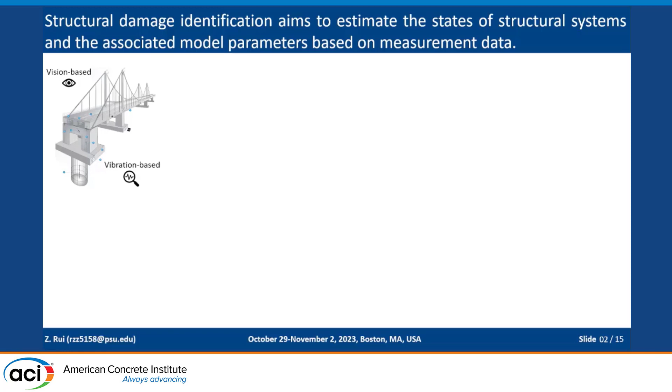So in that case, we can get a lot of data. It can be used as a classic input and output system. We can analyze this data using structural damage identification approaches to identify the damage and then assess the condition of the structure.

Based on whether we know exactly the model of the structure, it can be divided into two parts. The first is based on the physics model, which means we have a detailed model of the system. For example, we can use finite element modeling to create a detailed model.

But it can be computationally expensive, because when we get the sensor data, we need to update the model continuously. It can be computationally expensive.

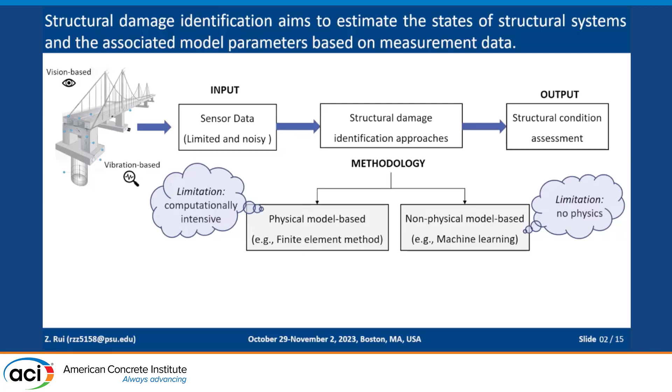Another approach is purely data-driven. In that case, we don't have exactly a physics model of this structure, but we can use machine learning, like neural networks, to represent this structural system. Both of these two approaches have benefits and also limitations.

However, recently, a new methodology called the physics-informed neural network has gained a lot of interest in different areas. The basic idea of PINN is to try to combine physics and machine learning.

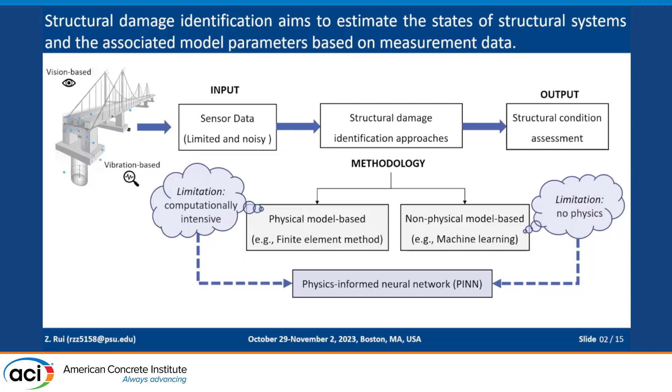Particularly in practical use, we have limited data, but we also have some physics, though not complete physics. In that case, PINN can be used to solve this kind of problem.

Before I go deeper into the methodology, I will give a brief review of how PINN works. This is a typical architecture of a neural network. It can map the input and the output with several hidden layers.

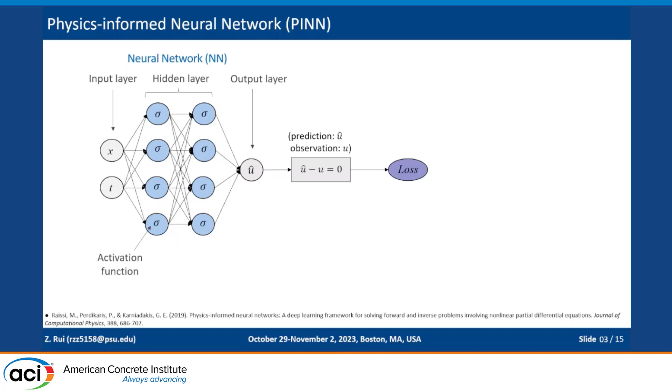The general idea is we try to minimize the difference between the prediction from the neural network and the measurements, trying to minimize the loss.

For the physics-informed part, we try to add some physics information, which means during the training process, the output should not only fit the data, but also fit the physics constraints.

So in that case, the loss will have two components: one is purely data-driven, the other is based on physics-informed constraints. By minimizing the loss, we can finally get the unknown parameters of the neural network.

At the same time, if the physics behind is incomplete, meaning some unknown parameters in the ODE or PDE need to be identified, they can be identified during the whole process. That's why it is very powerful, particularly for the inverse problem.

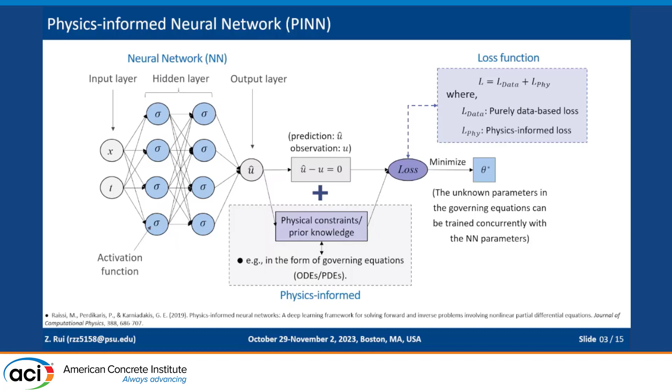Okay, so this is the basic idea of PINN. For today's presentation, we try to develop a physics-informed neural network framework, particularly for the structural damage identification problem, and I will use two examples to show the process.

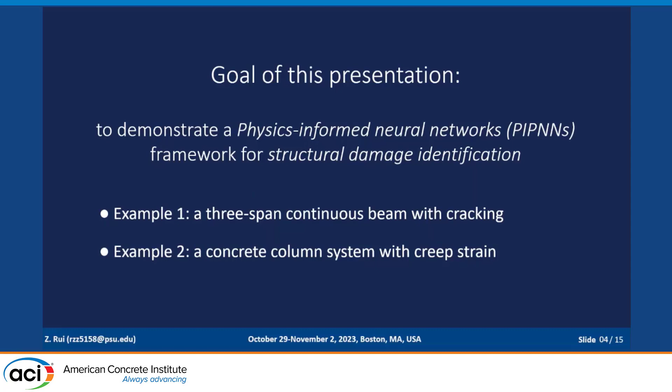The first example is a 3-span continuous beam with cracking, under a moving vehicle load. We can find that the first span and the third span have some cracking.

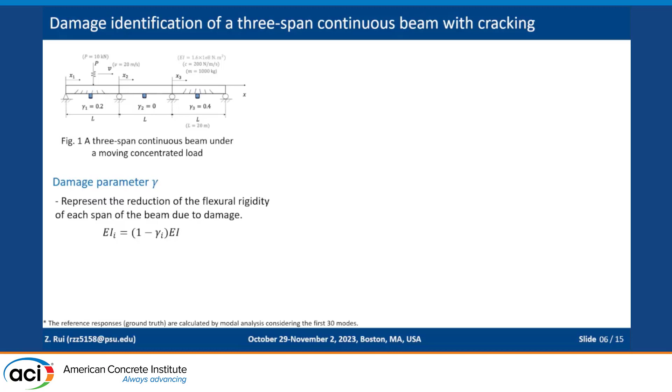We use a damage parameter gamma to represent the reduction of the flexural rigidity of each span of the beam due to damage. So gamma here is the damage parameter: if it equals 0, it means there is no damage, and if it equals a critical value, it means it has failed. Generally that critical value equals 1, or a value very close to 1.

So we use the damage parameter gamma to represent the damage, and the goal is to estimate the damage parameters. The given information is, firstly, we put 3 sensors, one on each span.

For the acceleration, we use in the numerical simulation some finite element modeling to get the response, and add some noise to show the real condition.

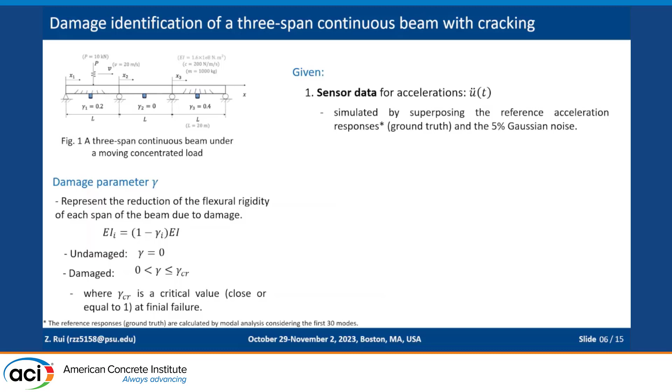And also we have some physics. The first physics information is a governing equation, which is a PDE function to represent the structural behavior between the acceleration and the deflection with respect to the moving vehicle load. The gamma right here represents the damage, but we don't know the exact value. So we also have the boundary conditions of each support.

So based on the sensor data, which is noisy and limited, and also the incomplete physics, we try, based on these two components, to determine the damage parameters for each span.

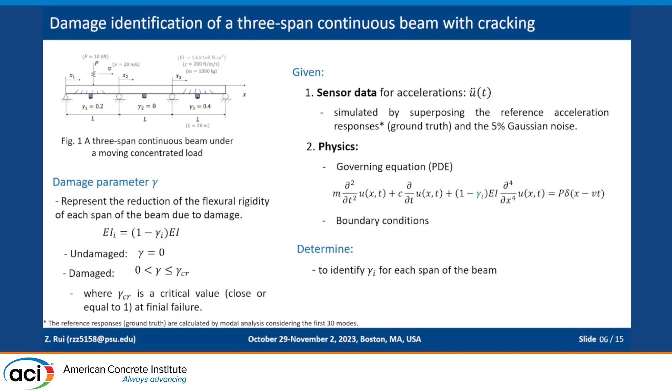So the next step is we try to create a neural network framework for solving this kind of problem. For example, for this case, we have 3 spans, so for each span we will create a neural network. I just showed the first 2 for the first span as an example. So the input is the location x and the time t, and the output is the deflection of the system.

So the first part is we got the sensor data, so the output should fit the sensor data. So we got the loss component with respect to the sensor data.

And another thing is for the whole domain, each segment should satisfy the physics, which means the governing equations. So we got the loss function with respect to the physics.

And also we have physics between the first span and the second span, which is the boundary conditions of the second support, meaning both neural networks should satisfy the physics at the interface between the 2 spans. So right now we can get all the sensor data and the physics loss component.

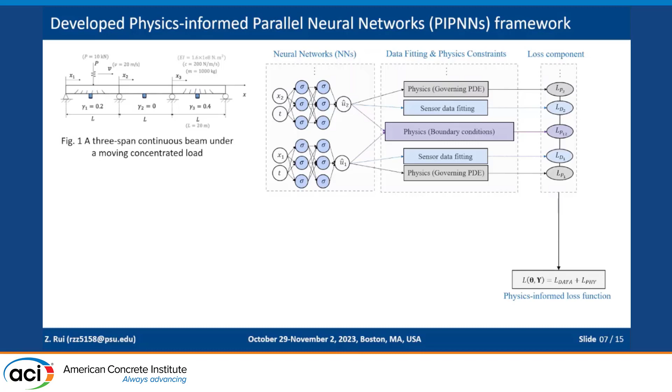So this is the combined loss function. We got the data and we also get the physics. By minimizing the physics-informed neural loss function, we can update the unknown parameters of the neural network and also update the unknown damage parameters.

So when we get the neural network parameters, we can get the neural network. And the trained neural network can be used to predict all the response of the system, meaning the 3 neural networks can represent this system. So this is generally the framework used for this particular case.

And this framework can be generalized for different use cases. If you change the load condition or change some parameters, the framework can still be used.

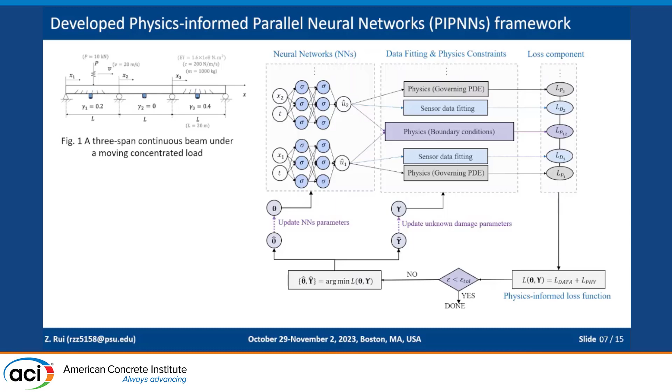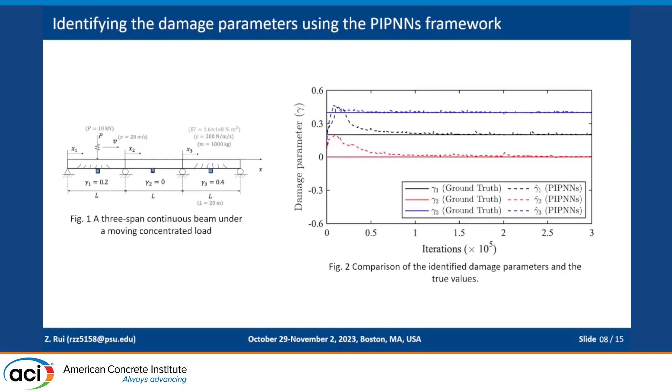So this is the material properties for the concrete. Firstly, we assume that the damage parameter gamma represents the reduction of the cross-section area of each component due to the damage. We can find that for each column the damage is different.

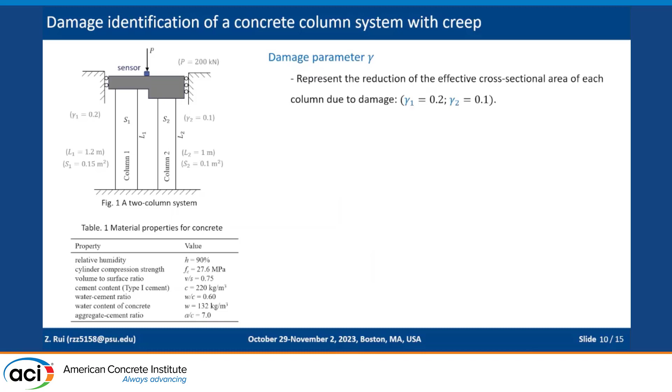We also add sensor data, which is a deflection, and we also add some noise to represent real conditions. We have some physics, which means the resistant force of each component, summed together, equals the applied load. Also, the displacement of each column should be equal.

So based on the physics and also the sensor data, the goal is we try to identify the parameters gamma of each column. And at the same time, we try to estimate the stress and also the strain.

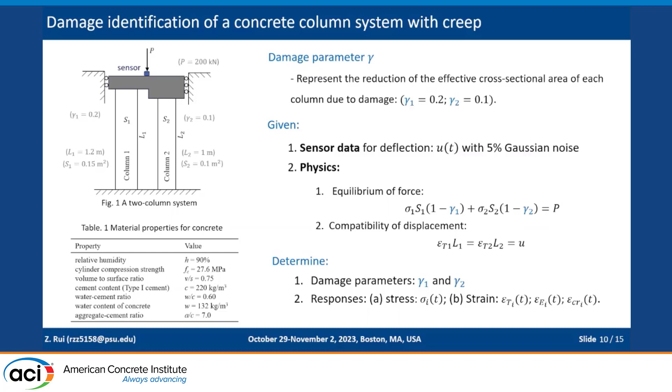For elastic condition, it is straightforward, we can get the response very easily. But if we consider creep or shrinkage, particularly for a concrete problem, it will be a nonlinear process, which is complex. But for the inverse problem, we can still use physics-informed neural networks to solve this kind of problem.

Before I go into the details of the methodology, I will give a brief review of how to get the shrinkage and also the creep. So I use a B3 model to calculate the creep and the shrinkage.

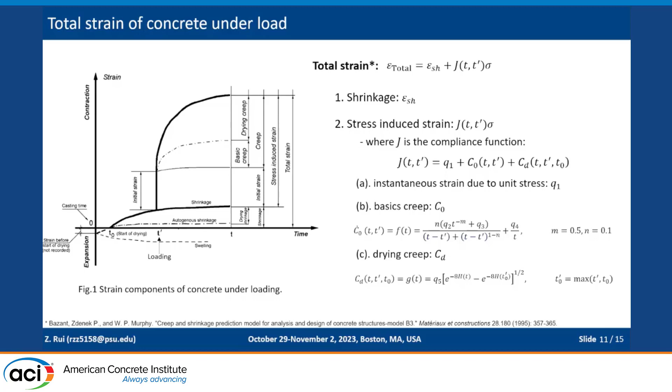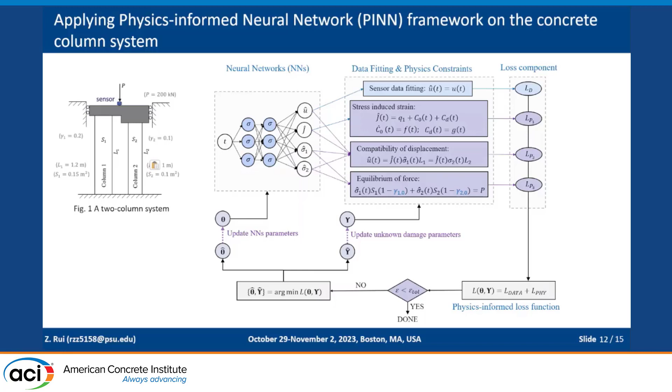I will skip the details, and after several iterations we can get the result. The first figure is about identifying the damage parameters. We can find after a few iterations, the identified parameters, shown as a dotted line, can converge to the ground truth. This is about the stress, which is normalized.

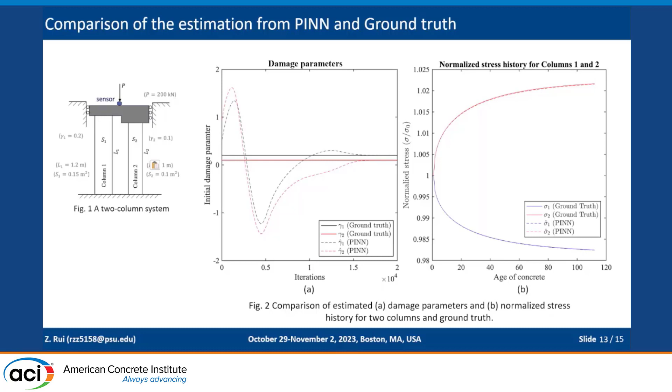The red one is for the second column. Because we consider creep and shrinkage, the stress will redistribute, meaning the stress increases for the second column but decreases for the first one. But again, the PINN can get a good result compared to the ground truth.

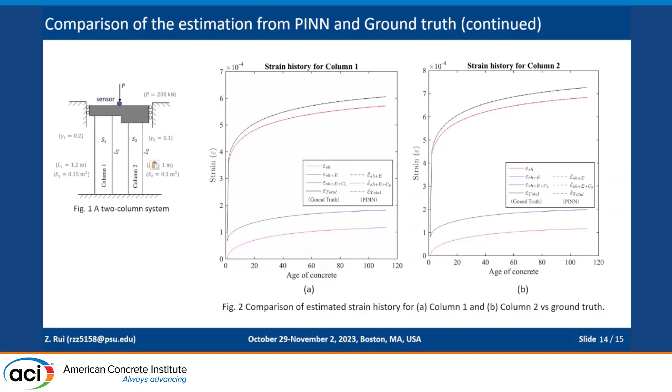We can also get the strain, including the drying creep, basic creep, and also the elastic strain. We can find again the PINN can get a good result and close to the ground truth. This is for the first column and this is for the second one.

Okay, so this is all about my presentation, and I won't give too much detail of the methodology. If you are interested, we can discuss later.

For this presentation, we demonstrate PINN work which can combine the physics and the data into a loss function, and by minimizing the loss function we can estimate the unknown parameters. We use two examples to show the PINN framework can identify unknown damage parameters, for example cracking, and also estimate the response, like the creep strain history, with high accuracy, even using noisy sensor data.